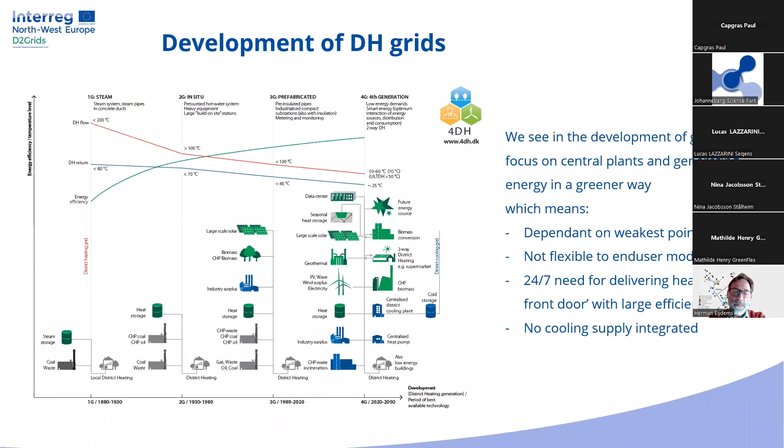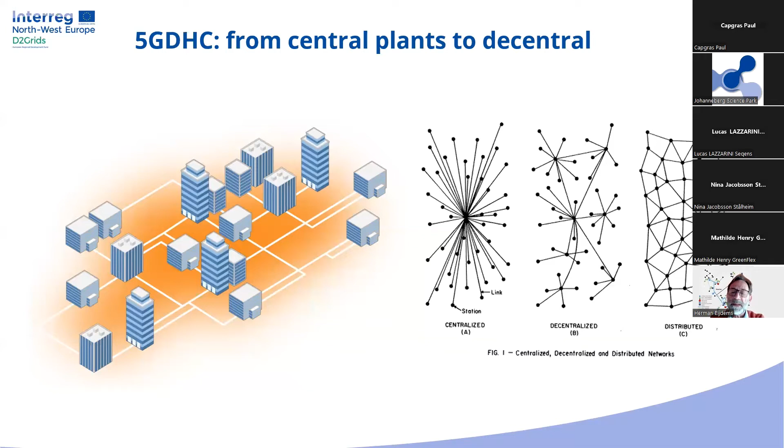What we want to do on the thermal grid, which is what we were developing in the city of Heerlen, is also to move from a centralized grid to the right, towards a cloud system. Next sheet, please.

That brought us to a twin pipe thermal system. And this twin pipe means that you have one warm pipe and one cold pipe. And if there are dwellings connected to the system, they will take heat from the warm pipe but also return cold to the cold pipe.

Because this idea is that we have a decentralized system mostly based on heat pumps, which you can use from the front side and the back side. So if the front side is giving heat to the dwelling, then the back side of this heat pump will return us cold, and we can feed this cold pipe with this cold.

If your neighbor has a different situation, that he needs cooling, you can take that from the cold pipe, and then you will return heat to the hot pipe. So you get a system which is feeding both lines. It's not like a supply and a return pipe. It's actually two supply pipes, one supplying cold and one supplying heat.

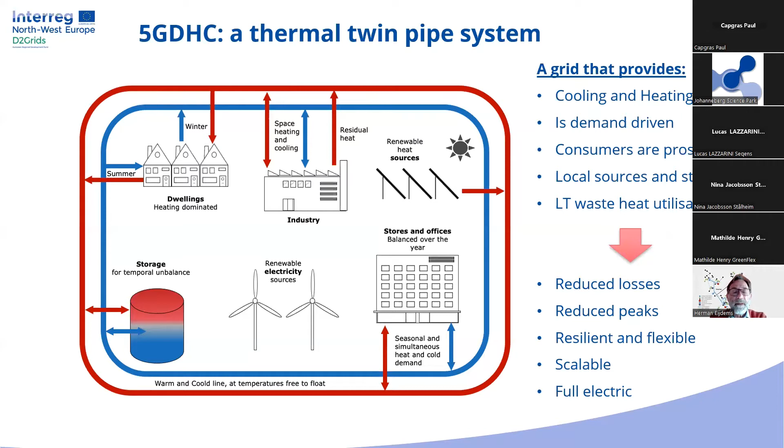In this scheme, you also can add renewable sources, and it can be local sources. You can add waste heat from industry. And finally, if you look over the city, you will find that there could be a net shortage of cold or shortage of heat. And you try to fill this in with a storage which is in the system. Finally, if you can't get that heat or cold demand from your storage, then you have to find external heating and cooling sources and use external energy.

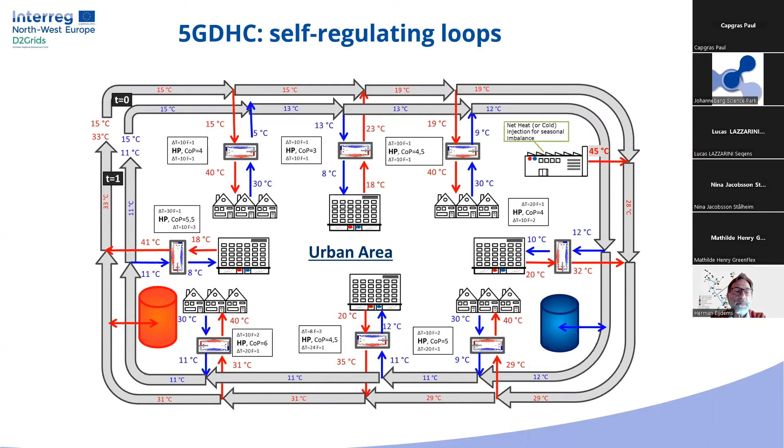Next slide, please. How did we come to this system? Actually, we had very simple assumptions in the beginning. We said it's kind of weird that we have one building, all electrical with heat pumps, blowing away heat from the roof, and the neighbor is blowing away cold from the roof. So in the D2Grids project, we said, that's not a good idea, let's connect them. But then we started to think, why are we doing this?

And we came up with 5 principles. And what I just told actually comes back in the first principle: try to close that energy loop. If somebody needs heat and somebody else needs cold, connect them to each other and start to exchange these amounts of energies, which means that all over the city you could have a saving in the order of 30%.

The second idea that we had is it's also bad if you need to raise a building 20 degrees Celsius above the outside temperature, that you start using flames and very high graded sources, like a 1000 degrees Celsius flame, just to bring up the building 20 degrees Celsius. You better use this in industries or other goals where you need these high temperatures, and they will give you a waste flow, and you still can use that waste flow for the buildings. So you use the energy that you bring into the city 2 times, first for the high graded processes, and then for the low graded processes.

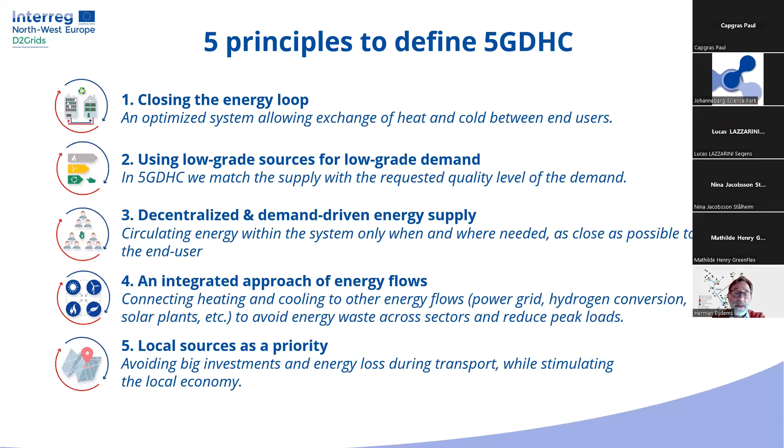And the last, use local sources. So often we are talking about the Sahara or other ideas, big windmills on the sea, and I think it's very fine, and we have to do those things. But if it's in your backyard, why don't you start using the energy in your backyard? And if it's not enough, then you always can go further.

So from these principles, you have to fix some system boundary to assess those data. We were working on defining KPIs. So if you can find a KPI which is giving you an idea how good you are doing on this principle, and maybe you want to put a weight factor behind it, then you can give it a label. And why do you want a label? Well, at some point you can check the system on many criteria and many performances. But if we want financing, we need trust in those systems, and this label could give trust to big investors that they get a good working system.

But actually we said it's not about putting labels and telling this city is better than the other one. Actually, what we try to find from this is guidelines, advice, which will show us how we can improve our system, because we are talking about district heating and cooling systems which will last for a long time and will have developments over 30 to 50 years. So what will be my next step, and can I see from this kind of assessment what will be good steps to get a better performance out of my district heating? Okay.

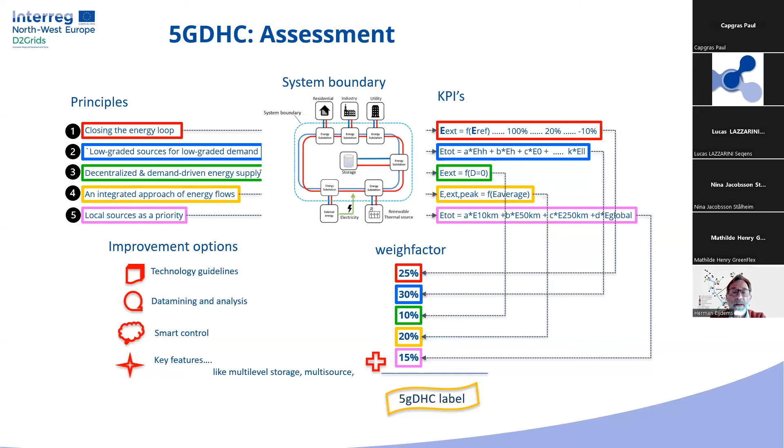Actually, then what we get is a system we call a multiple source and multiple storage system. So we look on the city level, and there we might have a big aquifer, or what we have, the reservoir of mine water. You might feed that reservoir with very low grade sources. And from that point, you bring it into the neighborhood where you raise the temperature, at least up to space heating demand. And you also want to build a storage there and feed it with other sources like industry waste or solar thermal waste or from conversion energy.

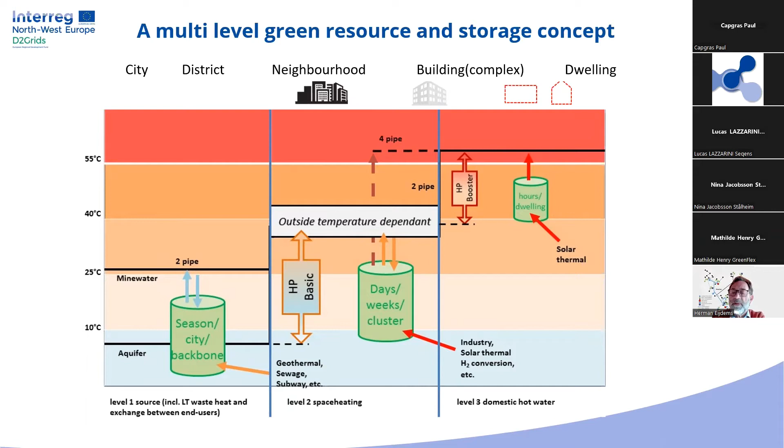Finally, you get into the building at the right and into a dwelling, and there we use small booster heat pumps, which will give the last raise in temperature for domestic hot water. And even there we have small vessels like 150 liters, which can be fed by local solar energy. Okay, the next.

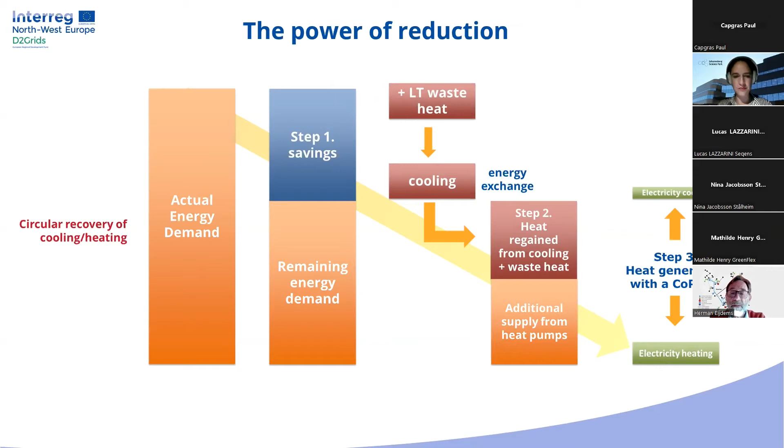Just a quick reminder to start wrapping up. Yes, I'm nearly done, Emilia. Thank you.

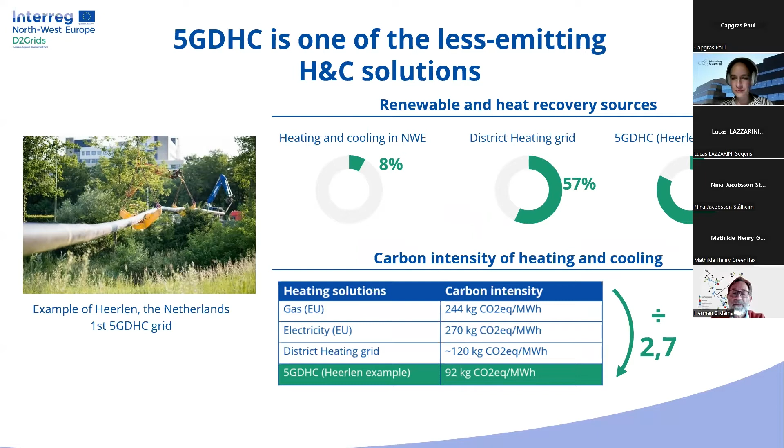This is what we're doing in the city of Heerlen, and we have this D2Grid project to see if in other places in Europe we can do the same thing, and how, as Mathilde said in the beginning, we want to get from 90% to 50% of energy saving, that this kind of technology will give us this kind of saving for buildings in the cities. Next one, please.

So this is my final sheet, and this is also showing this picture. It's the Dutch amount, the pie of the Dutch amount, where it shows that only like 10% of the energy is going to dwellings. And now if we are looking into the future, we can think what would be the next steps, and we found out that now we spend a lot of time and a lot of investment into energy systems which are affordable and also, I can say, acceptable.

And we try to put a lot of effort into insulating buildings, but it costs us a lot of money and a lot of time, and we find resistance if we go deep into those buildings. So from this point of view, from this technology, we should have another order in how we approach these energy systems. And the first thing should be to try to get your supply temperatures down, because the lower supply temperatures you need for the building, the better.

The second one is to reduce the amount of power, and specifically in the peaks. So can we reduce peak powers? And then the third one would be to save energy. And then finally, if we want to get there in 2050, I think we need one thing, and that's going faster, faster, and faster. So we should develop systems which are plug and play, which will be foolproof and will be smart, with a lot of controls and a lot of IT in there.

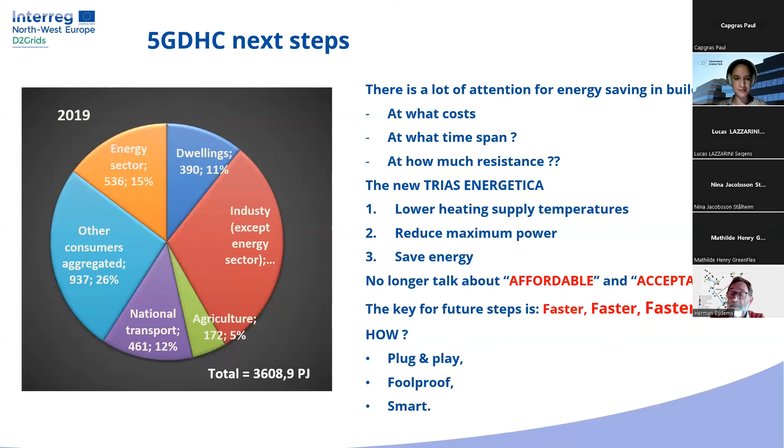You talk about this fifth generation, which is almost ideal anywhere you'd go. Is it relevant for existing networks, or is it only for new production? Actually, yeah, that's a question that we get a lot. In the Netherlands, we have 6% of district heating now. So there are a lot of green fields where we can apply and build islands of these fifth generation systems. Just take a neighborhood and you can start on a very small scale.

But actually, if we look at the existing grids, then we see that they have to expand too. At the 6% we have, they have to expand up to 30-40% in the coming 30 years. And then the fifth generation could also be a very good strategy to connect green fields in an existing grid, and use that old grid as a backup for peak powers. And in time, if those districts develop further and get greener, then you will use this backbone less and less. And at some point, maybe in 30-40 years, you can even skip the old system and step over to the new fifth generation system.

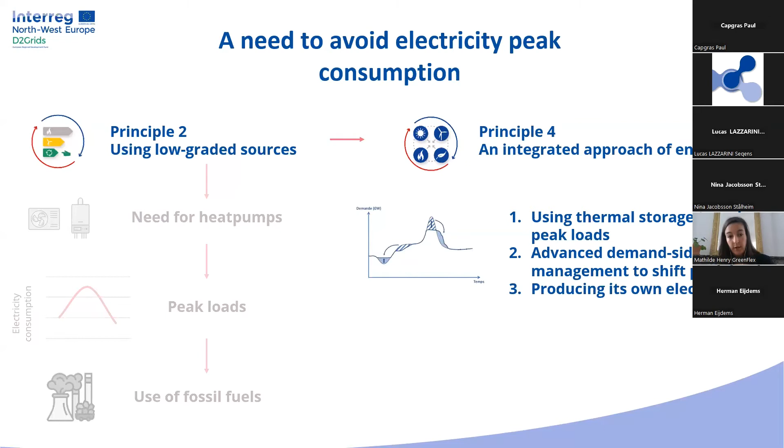These two parts are more on the thermal aspects, and we're not studying them today, but you will find a lot of information on the D2Grids website. You can go on 5gdhc.eu, where you will find best practices used by the pilot sites on these subjects. Today we will focus on the third option, which is to produce and store its own electricity so that we don't create additional peak loads on the electric grid.

Next slide, please. So the goal of D2Grids on this matter is to encourage grid owners, grid operators and municipalities to have an integrated approach to the energy consumption of the power grid and the thermal grid, in order to reduce greenhouse gas emissions and energy costs. So the first goal is to bring best practices for production, distribution, storage and management of local renewable electricity into the best practices we have developed in 5GDHC grids.

And yeah, that's the first goal. It's not about inventing new technology solutions. It's just bringing all the best technology, best practices all together, bringing the best practices from electricity and from thermal grids.

The second goal of studying that aspect is to create a local energy community with low carbon emissions. So as I said, if you produce your own electricity, you will participate in avoiding peak loads on the grid and therefore the use of fossil fuels. And you will produce your own electricity through, for instance, PV systems, which are renewable energy. So you will decrease the carbon intensity of the use of your grid, both the thermal and the electric grid.

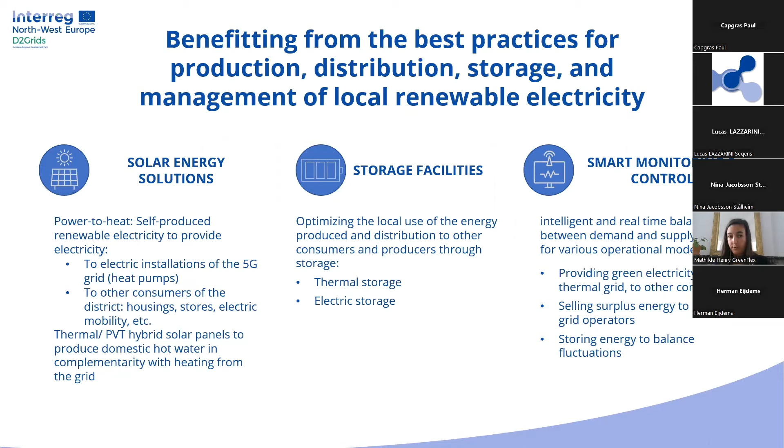So there are different things that could be managed through smart monitoring to best use the electricity that is produced thanks to the solar solutions. So as I said, it's not really a technological challenge, as we already have the existing technologies on the market that might need to decrease their cost, especially for storage. But it's mainly a governance challenge, governance innovation.

There are different aspects that can be studied and that will be studied inside the D2Grids project. There is how to finance the installation. There are different solutions that exist. The energy could be produced, owned, and stored by the grid owner, by the grid manager, but it could also be sold by a client of the DHC, as I said, and we will see an example from Paris-Saclay right after, or it could be third-party financing or a bit of all of these options.

So there are a lot of solutions that could be studied in the financing and owning aspect. Also, there's the contracting and governance aspect that is really interesting to be studied: how to manage the distribution of the energy that is produced among the users for shared benefits.

If it's not only used for the DHC grid, as I said, it could be used for other buildings, other consumers, for other uses like electric mobility, or it could be used for the electric grid.

And finally, the revenues and pricing. How can you make some economies thanks to producing your own electricity? How can you select or define the price of the electricity? For instance, if it's a consumer of the grid that is producing the electricity, can they have an exchange of benefits if one consumer produces the electricity, sells it to the grid, and pays for the heating in exchange? Or also we were thinking maybe there could be a social electricity price, for instance, reducing the price for social housing families, getting higher for richer consumers. This kind of thing is interesting to be studied.

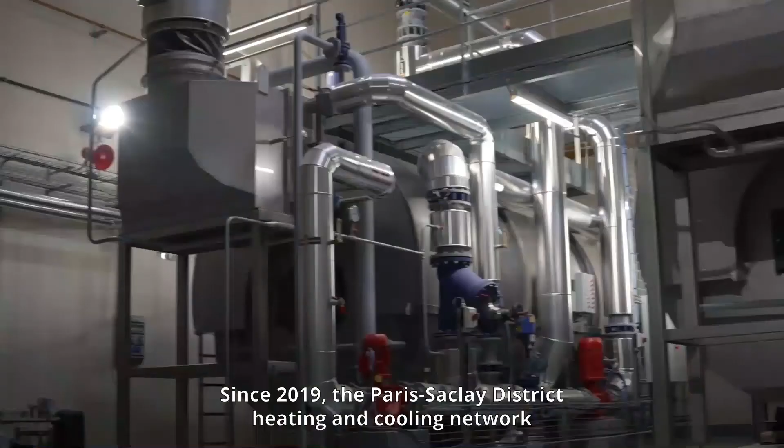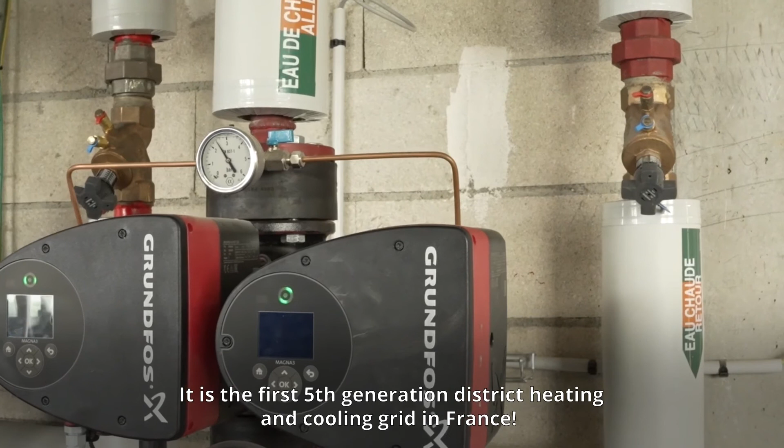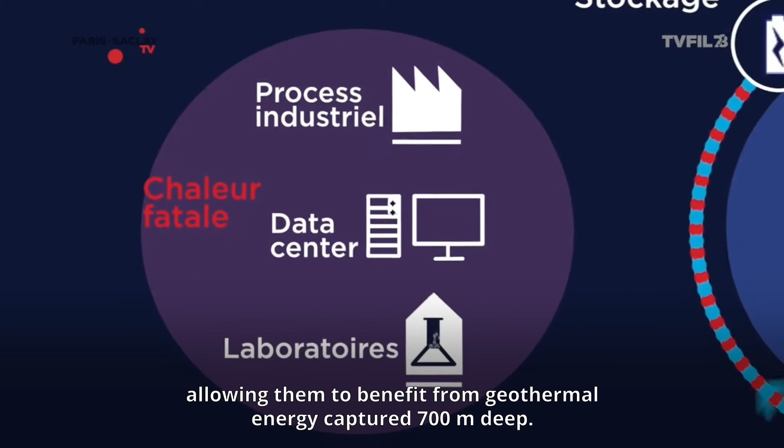The Paris-Saclay District Heating and Cooling Network supplies the Paris-Saclay urban campus by using local energy sources. It is the first 5th-generation district heating and cooling grid in France. Networks run under the campus roads to connect its buildings, allowing them to benefit from geothermal energy captured 700 meters deep. It also allows the exchange of heat and cold between buildings, which is what we call heat recovery.

So as was said, the Paris-Saclay grid is the first 5GDHC grid in France. It's based on geothermal energy that supplies the tempered loop, and then the energy goes to active substations where there are heat pumps that bring up or bring down the temperature to the right level for a cluster of buildings. As Herman said before, in some 5GDHC grids you have one heat pump per building. Here in the Paris-Saclay site, it's one massive heat pump for a cluster of buildings, so it's quite different from what was done, for instance, in Heerlen in the first 5GDHC pilot site.

Maybe before we go into more details on the solar aspect of Paris-Saclay, could Herman present the grid in the Netherlands quite quickly, and then we'll go back to the solar aspects.

Yes, thank you, Mathilde. In the city of Heerlen, we were building this system on the mine water reservoir. But we also had this movement to connect 5 times more buildings on the same source. So thinking further, we said if we go on in this process and make this grid so smart and self-supporting, then we don't need a mine water reservoir at all. So in this project D2Grids, we started the scheme in the city of Brunssum without a mine water reservoir. But what we did do is drill for an aquifer. This aquifer, unlike the mine water at 700 meters subsurface, would be more like 80 to 100 meters.

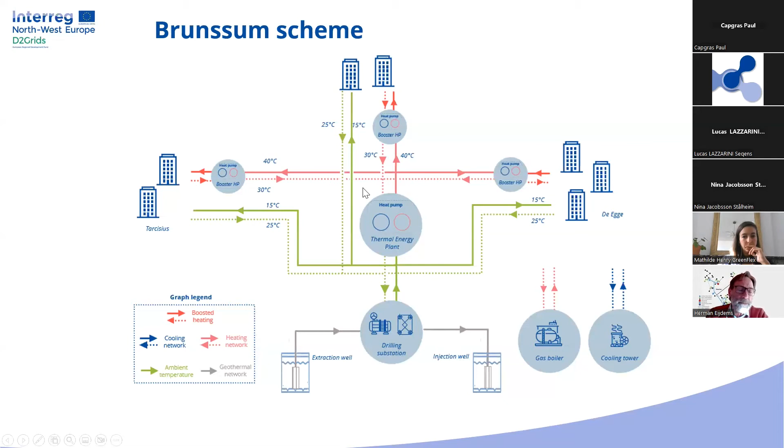Hi, I'm Jon Selman, also Alastair from Plymouth City Council, in the southwest of England, a coastal city. We'd like to introduce the pilot site, which is in 2 distinct clusters, designed to join together, but have different characteristics.

Can I have the next slide, please? The pilot is in 2 clusters which have different heat network characteristics, but in both areas we are trying to use multi-vector approaches, combining renewable electricity generation with the deployment of heat pumps and heat networks.

The first cluster is the Guildhall cluster in the city centre. Lots of mixed use buildings, quite challenging, some historic, but we're relying more heavily on air source heat pumps across a number of different locations within the heat network. The interesting point is that some of these air source heat pumps are designed to also work in water source mode, as we connect into 5th generation lower temperature networks. On this slide you can see a green line on the map on the right, which is the private wire network that exists in this cluster.

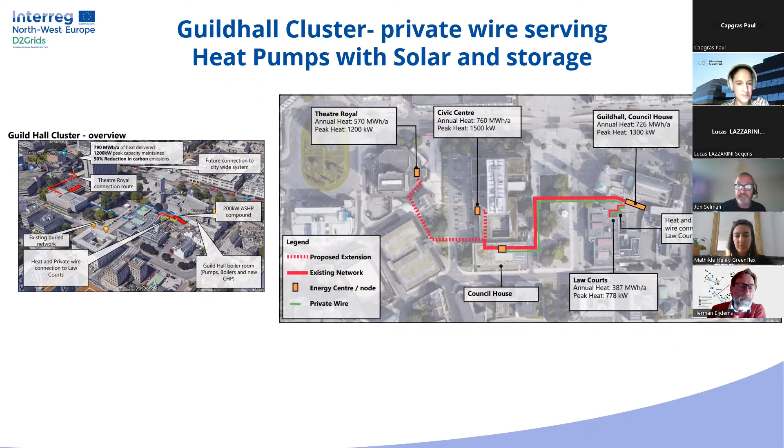In the first phase of this work, we've been putting a significant amount of solar on our buildings connected to this private wire, but we've also been using a very small combined heat and power unit, a CHP unit, to try to balance the system between summer peak generation of solar and winter heat demand. There's quite significant new demand within that network from the air source heat pump that's been delivered. The private wire network we're looking to expand to join in new generation, additional solar generation, but also additional heat pump deployments as the network expands in the second phase.

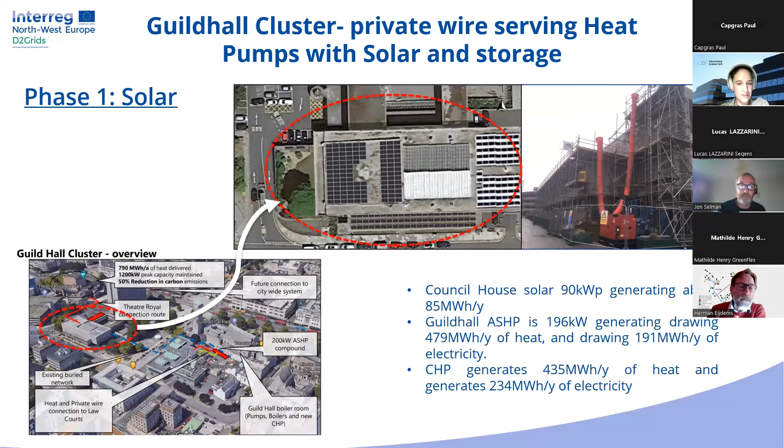If we could go to the next slide, please. I'll just hand over to Alastair to talk about phase 2 of the Guildhall and also what we've been doing on one of our buildings to connect in Mill Bay.

Yes, hi, thanks John. As you know, a lot of work goes on behind the scenes. At the top right there's a 3D version of what John was showing you from a plan view, with the Guildhall, the council house and combined courts. That's where the private network is, the electrical network, and we are already putting solar PV on the council house. But we also want to look at utilizing the top roof of a car park, which is underutilized in the city, to put more solar PV on top. At the bottom left there's an example of somewhere else in the city where that's already been done.

We want to do that, possibly as a solar carport type of installation, so that in the future, if parking is needed there because of changed use in the city, it can still be utilized, but we'll still get the solar. The idea is to bring a cable across from that PV system to the private wire, which helps, as John mentioned, balance the loads in there. We have heat pumps going in, so having renewable generation on site would help decrease the amount of grid import needed and give some grid relief.

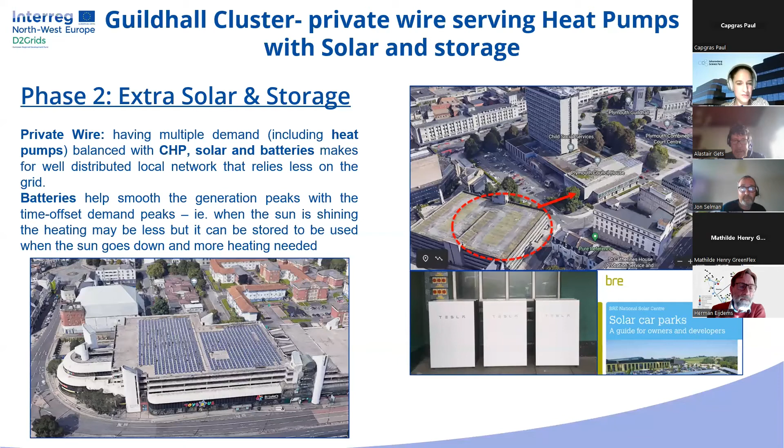So this is another part of the city where we're also installing a heat pump, an air source heat pump, which has the ability to connect to water in future, and for the whole system to connect to the district heat network.

There's a split system with the compressor compound on the lower floor and roof-mounted evaporators up on the roof. On the left is an old photograph from Google, and then a drone shot we took of the solar PV on the roof with the evaporators in the center of the building, just in front of the lift shaft.

This helps decrease the amount of extra electricity needed because of the heat pump. In Plymouth, or in the UK generally, gas is cheaper than electricity, so when you put a heat pump in, your overall energy costs actually go up. Installing solar PV helps reduce that situation. Of course, gas is getting more expensive too.

There's some numbers there: about 64 kilowatts of solar on the roof, and the air source heat pump is around 200 kilowatts. Thank you.

Thank you too for this quite wide explanation on your grid and on the solar solutions you have started installing on the rooftops. Maybe Lucas, you want to present your project to provide renewable electricity, solar electricity, to the grid of Paris-Saclay, and present why Seqens has decided to do that, and what your company is.

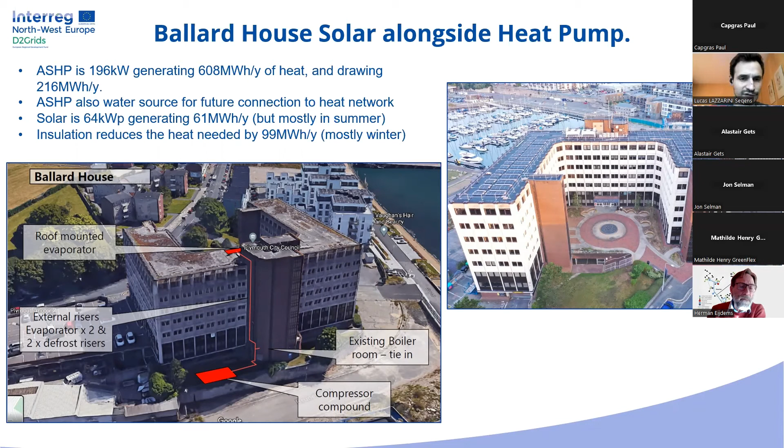Okay, yes, I will start with who we are. We are a French social housing company. We own nearly 100,000 dwellings in the Parisian region. Three years ago, we acquired three units on the Paris-Saclay district to develop three different buildings.

These buildings are going to be heated by the district grid, so we're a client of the Paris-Saclay heating grid. In the process of acquisition, we committed to install solar panels on the roof of our buildings.

So we've made a lot of feasibility studies for our solar panels, and those studies have shown that we can install 250 square meters of PV panels for a capacity of 59 kilowatts and a production of nearly 60 megawatt-hours per year.

So we searched for solutions to use this electricity, and we noticed that we can of course use it for our buildings, especially for the shared equipment. But we also noticed that our peak of consumption won't be the same as our peak of production.

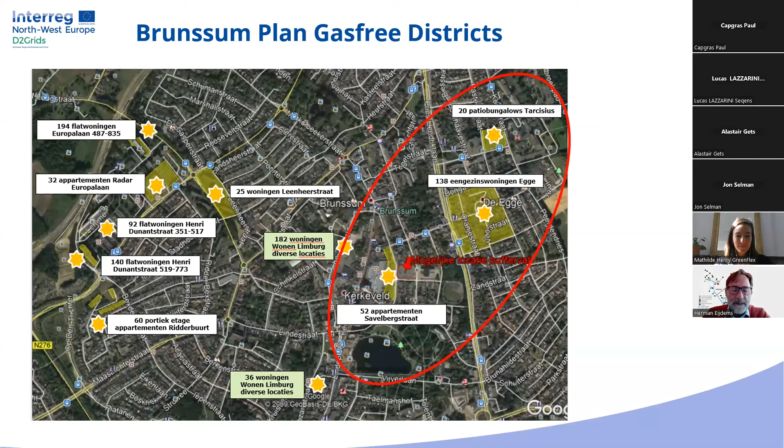So what we did is, this is the idea that we have a basement subsoil, and this is a concrete basement prefabricated. And in this basement, we bring in a skid with all those installations. This is pumps and storage vessels, but also the heat pumps and the controls that we need and the heat exchangers. And from this subsoil sector installation, we would connect all the dwellings, which actually now in this pilot are all new build dwellings. So that's a bit easier for the low temperature system.

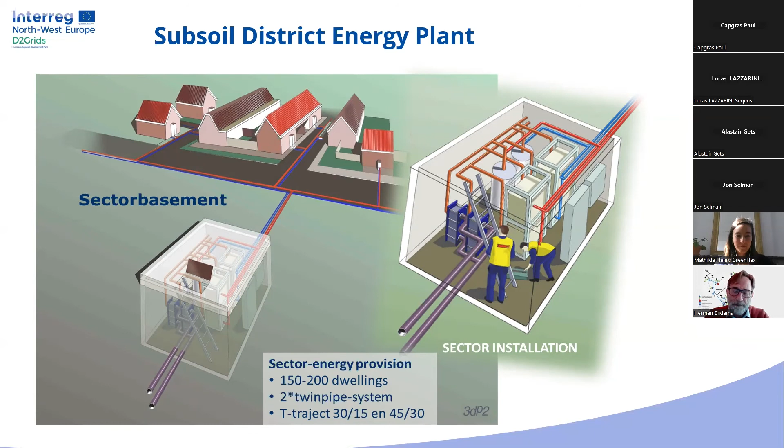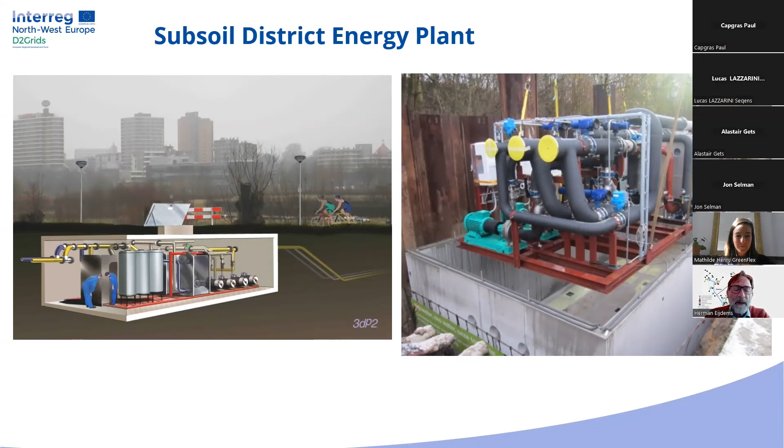Next slide, please. This is another picture of this idea. Actually, we are very happy with this kind of prefabricated working because we have very little disturbance in this neighborhood. We only need 1 or 2 days to bring in the installations, and then we can connect them and start connecting the buildings to it. Next slide, please.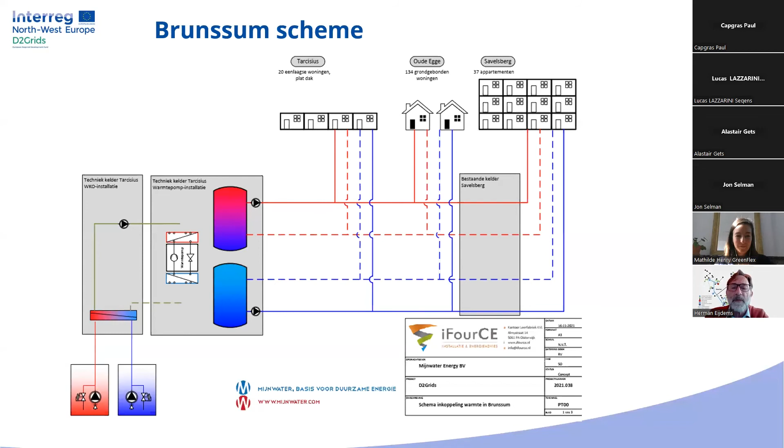So this is another picture of the scheme. On the bottom left you see the hot and the cold well from the aquifer. Then it's going to a first basement which has the installations for the aquifer, its heat exchanger and pumps, and then from there it goes to the second basement where we have all this technology to feed the four pipe system to the different complexes of dwellings.

Okay, next slide. And a picture of those buildings that we connected. Left above, you see those elder care apartments for elder people. Actually, they do have a very nice flat roof, so we were looking at that roof to see if we can bring solar panels on them. And then on the right, it's old mine worker buildings, but they were rebuilt in the same style. People are really happy there, and they are all connected also to the 5G.

And then left bottom, we have a complex of apartments which also are connected to the system. On the right down, you see one apartment that we also provided with a heat pump and internally made ready for 5G. So we call this one 5G ready because we don't have our pipes there yet, but this building is already internally done. And if we get a pipe over there, then we will connect it to our grid.

So this is a picture of the energy consumption. It's what the aquifer is doing. And you can see we took about 3,000 gigajoules of heat from the source, but only brought back 224 gigajoules of cold. So that was one of our problems. Those sources must be in balance, not to deplete them, but also for the permits that we have. So we needed to look into more heat generation to feed the source with heat.

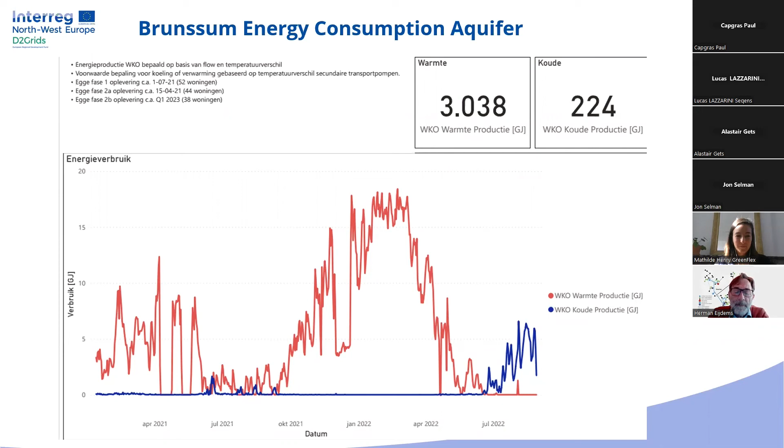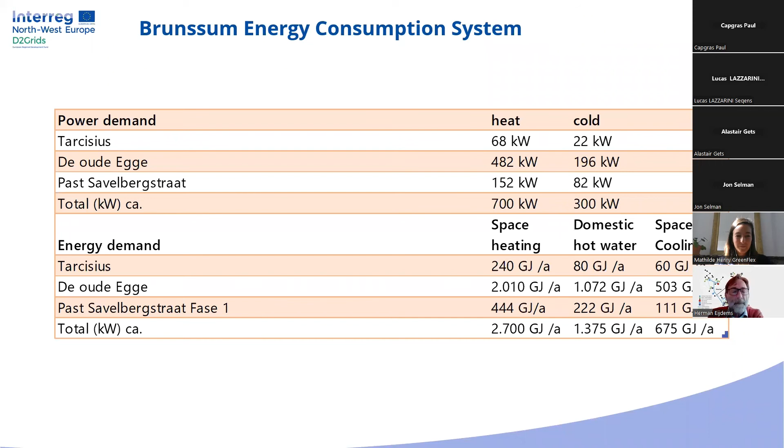Next one. We did this feasibility study, and if we look into the power that we need, we see we have a total power needed of 700 kilowatts of heat and about 300 kilowatts of cold. And then if we go into the energy that's consumed by that, you find those figures, about 4,000 gigajoules of heat and only, I can't see that one, but I think some 600 gigajoules of cold. Okay, next one.

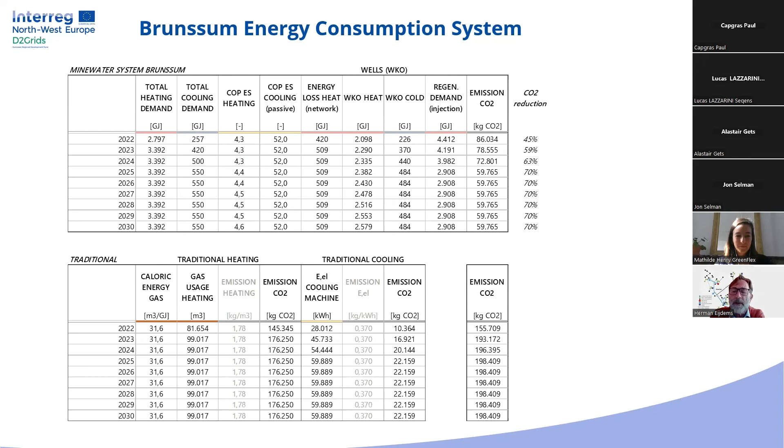So this is a more detailed scheme of how we look into the future up to 2030, and you see that those heat and cooling demands, if we don't change the system or connect more dwellings, will be more or less the same. But also, if we feed this by an airborne heat pump in the summer to generate heat for the source, and in the bottom we have the comparison to traditional natural gas boilers and a traditional cooling system, we still will have a carbon reduction in the system, which is going up to about 70%. Okay, the next.

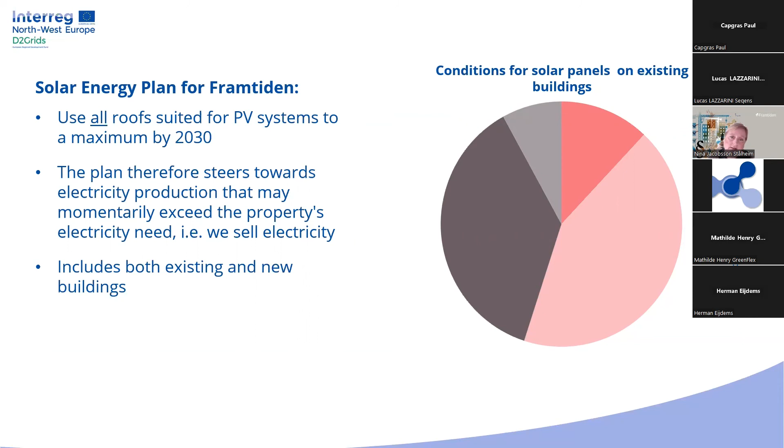Next slide. And just some figures on the capacity that we are aiming for. And all this installation is calculated to be a good return of investment, and we think even more profitable than we've been calculating with the energy prices right now.

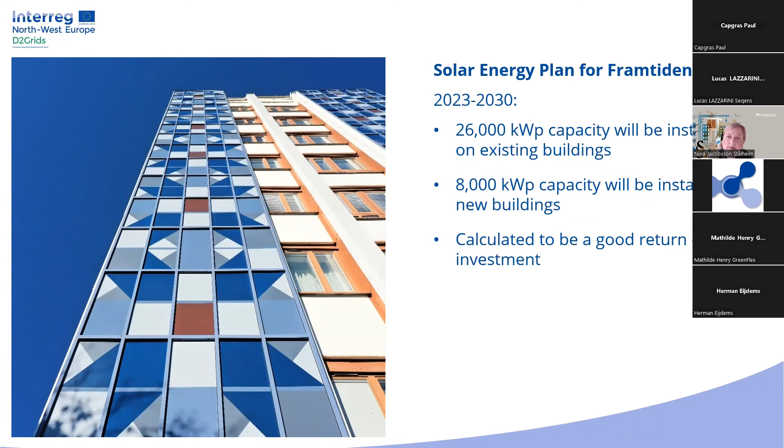And the next slide. At the same time, we've got an energy plan for the city of Gothenburg, and here we also investigate more smart systems and how the properties are more integrated into the greater energy system. And we will look into solutions like vehicle to grid, energy storage, positive energy districts. We have one pilot going on right now, etc. So installing PV systems is just a part of a more integrated system approach that we will continue to work on further on.

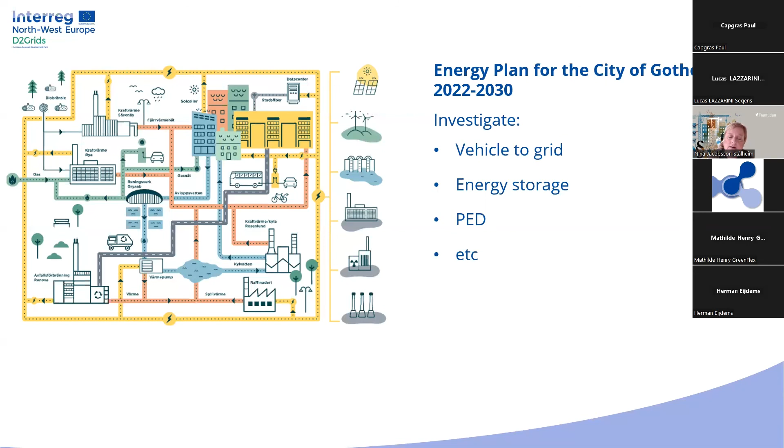Thank you for that presentation and really forward-looking project you have for your buildings in the city. I'd once again ask our participants to feel free to use the Q&A session, but while people digest your presentation, what do you see as the return on investment period for these installations? Right now, it's just a few years, so less than 5 years with the current energy situation. Excellent.

And what I found very interesting from what you're doing at Framtiden is that oftentimes, when talking with cities and energy providers across Europe, they think it's the energy provider that needs to do the work and install these systems. And here you see, no, the building owners also have a very proactive role to play in balancing the grid, in helping the city become climate neutral.

One more question to you, Nina. For people in the audience looking to do this, what gave you the inspiration? It's a very ambitious project and a proper commitment. Where does that commitment come from? First of all, we have this really ambitious environmental and climate program in Gothenburg decided by the politicians. But also, during the past 5 years, we had a plan for PV system installation, and this turned out to be a great success and really profitable for us. So it's not just saving the climate, it's also good business. So, lesson learned, we said, okay, then we can go all in up until 2030.